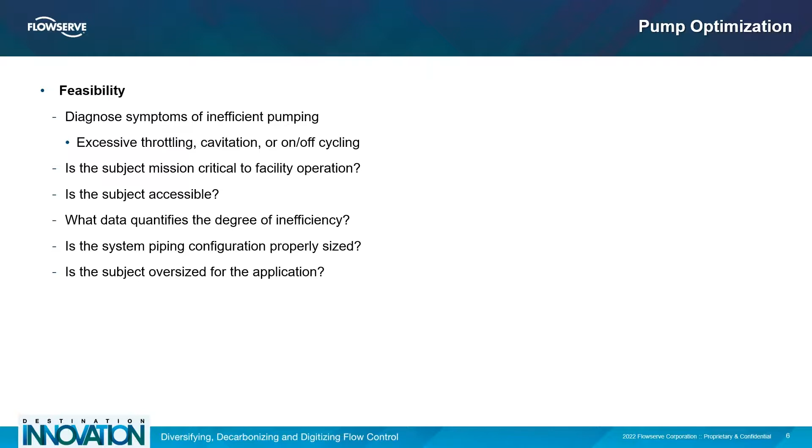Often the largest recurring cost to operate a pump system is related to the energy consumed by the driver. For the basis of simplicity, this case study will focus on an electric motor driving a pump. An overall rate of 9 cents per kilowatt hour will be assumed, though this will vary greatly depending on what is negotiated between the site and the utility provider. Things that may impact the overall cost of electricity will be the usage history, the rate schedule negotiated, the time of draw throughout the day, and potentially the percentage of green content supplied on site.

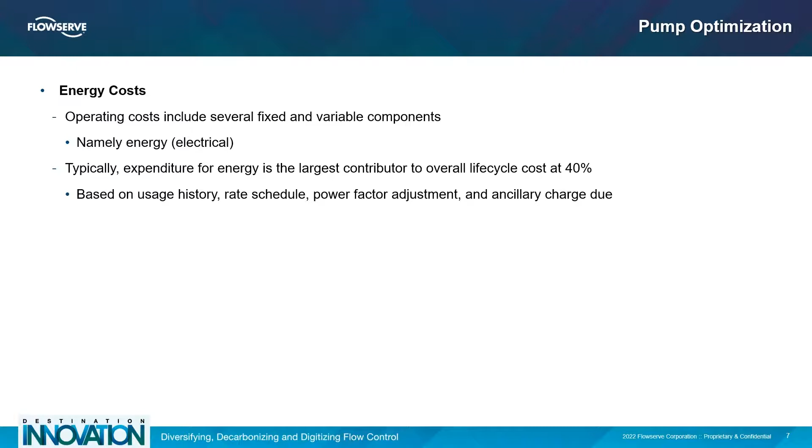There are two basic methods for estimating pump power consumption and one choice for empirically determining its consumption. The first two can be conservatively determined from either the motor nameplate information or the pump performance curve. The latter requires on-site testing for current and voltage draw to the driver. To get accurate data from the test, it is best to allow for a sufficient time span of data to be recorded to better understand peak loads and seasonal demands. For simplicity's sake, the motor nameplate information will be used for the case study to follow.

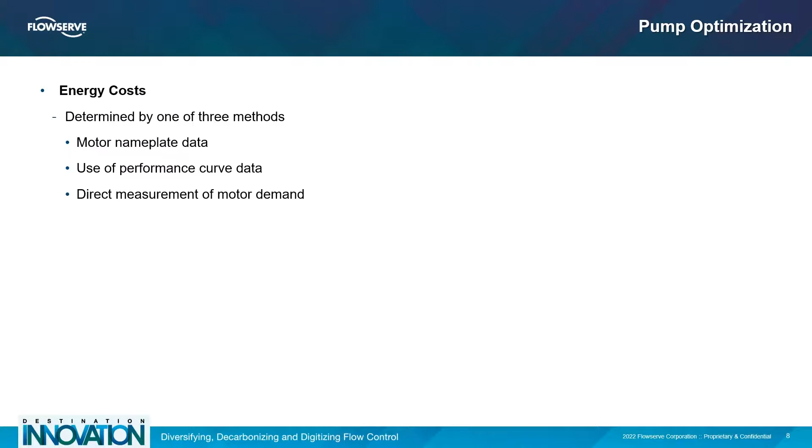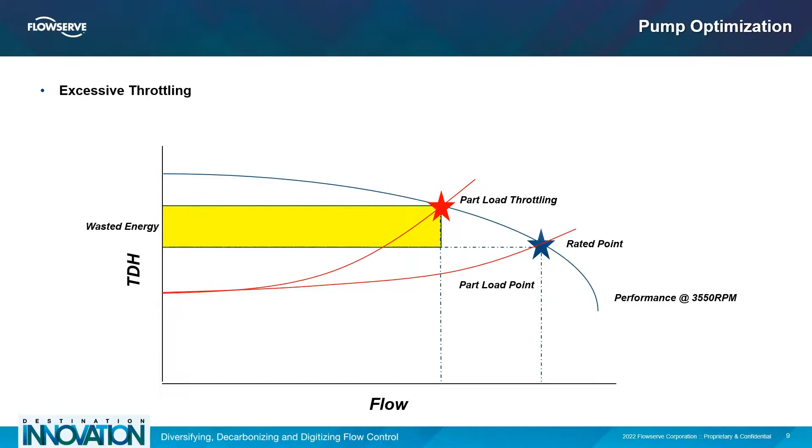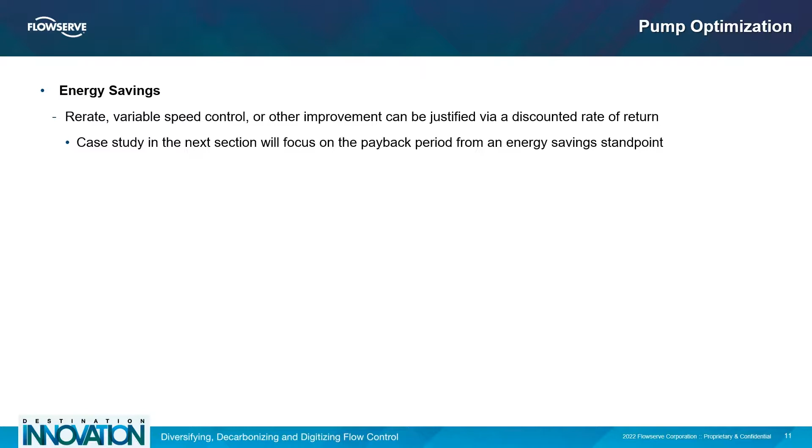This is a graphical representation of how energy is wasted across a valve when throttling away from the design duty point. The yellow area highlighted represents the destructive energy wasted from throttling in the form of noise, vibration, and heat. Although the valve takes a beating, the accompanying pump and its seal will also have to endure exposure to such operating conditions. So what can be done to limit the destructive force upon the valve, pump, and seal? Depending on the situation, suitable options may include a proper hydraulic re-rate of the pump, a redesign of the pumping system, or implementation of speed control.

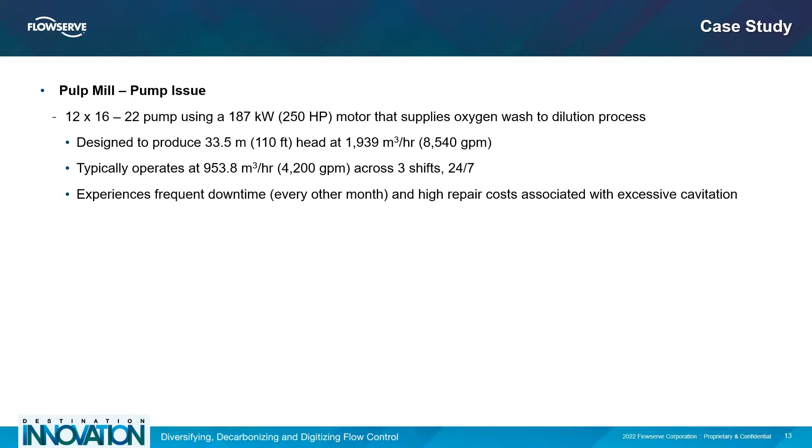Bearing this in mind, the case study opens with a bad actor pump at a pulp mill. The pump specifics are given, and what stands out is that typical operation is in the range of half of the design flow. Since operation is sufficiently far away from design, cavitation-induced downtime is frequent. The customer is expecting a budget-conscious solution to extend mean time between failure that effectively justifies the capital expense for the optimization itself. In order to cut the power demand and increase uptime, the solution is to install a variable frequency drive, or VFD for short, paired with a smaller motor. This allows operations to slow the pump to the desired flow and not throttle the excess head, highlighted in yellow, promoting the life of the pump, its seal, and the valving in the system.

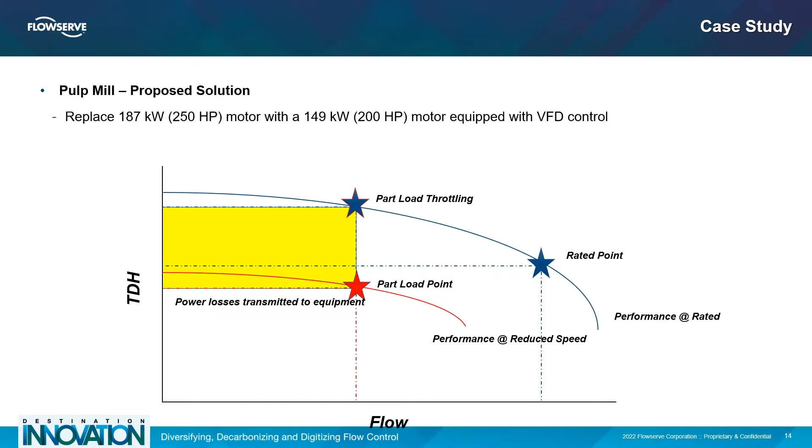Using the nameplate data to estimate our energy demand, the horsepower must first be converted into kilowatts of electricity. Then the efficiency of the drive at the load rating must be applied. Thereafter, the cost of electricity can be determined from the overall price per kilowatt hour of usage, given in this example as $103,885 annually, though bear in mind that those using the metric system can simply avoid the first conversion from horsepower to kilowatts.

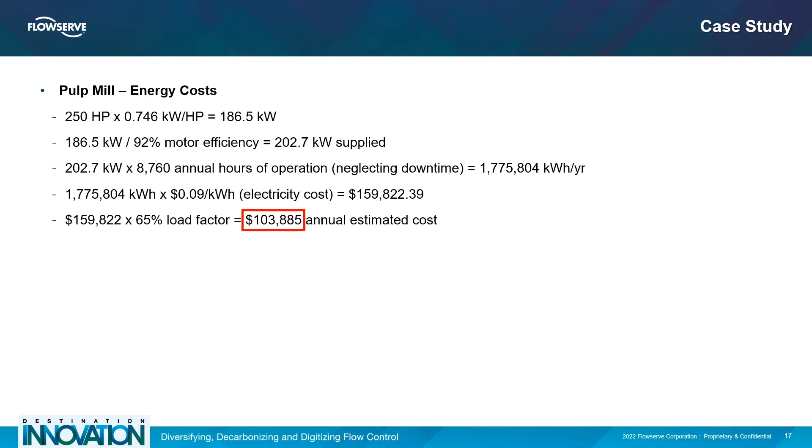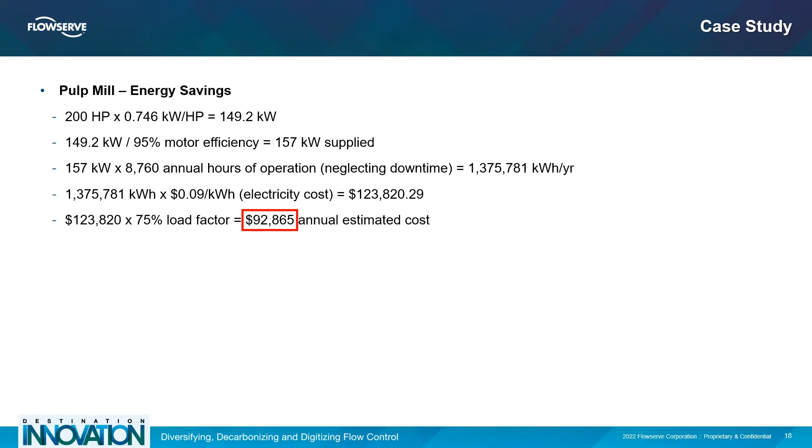Now repeat the calculations and compare this to the potential energy savings for using speed control. The total estimated annual cost of electricity is now only $92,865. We see that there is over $11,000 that can be saved annually in energy, though that is only part of the savings picture. So let's take a deeper dive.

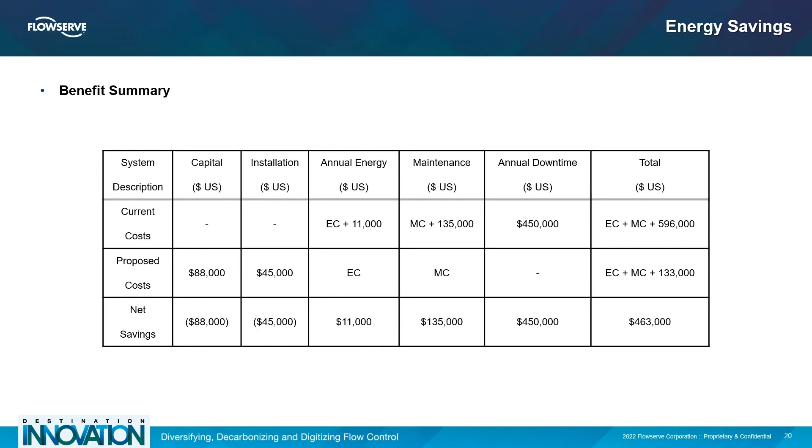Taking a closer look, there is greater savings stemming from the speed control in reducing maintenance expenses and typical downtime annually. In fact, the capital cost of implementing the solution, that is, the $88,000 for purchasing the equipment and another $45,000 for installation, results in a net savings of $463,000 that is achieved in the first year of installation. Thereafter, the repeated savings of $11,000 of electricity and $135,000 of maintenance will be achievable. This means that without the savings of production uptime, the solution will pay for itself within the first year, making it an incentivizing option for savings and reduced carbon footprint.